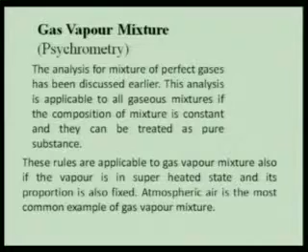Atmospheric air is the most common example of gas vapor mixtures. In this gas vapor mixture, dry air is considered as a pure substance. However, the water vapor is always associated with it in normal practice.

The composition of water vapor with dry air changes with change in atmospheric temperature during the day, and as such this mixture under such conditions cannot be considered as a pure substance, and additional parameters are required for the analysis of such mixture. Psychrometry is the name given to study of air water vapor mixture.

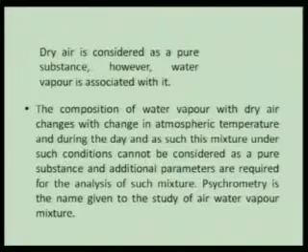I would like to explain it. Air that is associated with water vapor, if its composition does not change, we can treat this air as pure substance, but we are aware that composition of water vapor in the air is changing with time and with the season. In the morning, the moisture contents of air would be more.

As the day progresses, in the afternoon, the humidity contents, the moisture contents of air may decrease. In the evening, again they may increase, and as such during the day, composition of the atmospheric air, as far as it is concerned with dry air and moisture components, is variable.

If this composition is variable, it cannot be considered as a pure substance, and different set of conditions and analysis are required for analyzing the problems in air conditioning, and this science which deals with composition of air and moisture is defined as psychrometry.

In psychrometry, in air conditioning, we are concerned with moist air, and normal atmospheric air is the moist air, and it consists of dry air along with some water vapor associated with it. At normal atmospheric temperature, the water vapor is in superheated state.

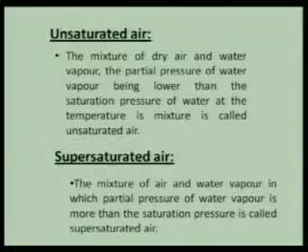Supersaturated air is the mixture of air and water vapor in which partial pressure of water vapor is more than the saturation pressure. When the partial pressure of water vapor is more than saturation pressure, suspended water particles are associated with the water vapor, and the water vapor is wet; this air is defined as supersaturated air.

What we see during the winters, in the morning there is lot of fog.

This fog is a form of supersaturated air, because this air in the morning, when we see that there is fog, that air consists of water particles associated with water vapor, and therefore the visibility becomes poor, and it is supersaturated air. For this moist air, the humid air, we have to define certain additional properties, and these properties of moist air have been defined here.

The first property that we need for moist air is dry bulb temperature. The temperature as measured by a normal thermometer is called dry bulb temperature. Temperature of the air is dry bulb temperature.

The other property of moist air is dew point temperature. The temperature at which water vapor in air would begin to condense if air is cooled, keeping the pressure constant, is called dew point temperature.

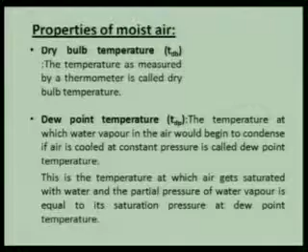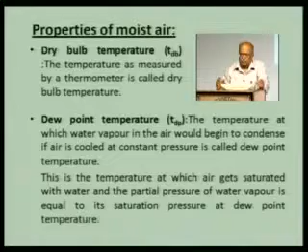We must have seen that if we keep a chilled glass of water on the table, water droplets start condensing on the surface of the glass. That means the moisture in the air starts separating, and the temperature where this condensation starts is defined as the dew point temperature. This is the temperature at which air gets saturated with water, and the partial pressure of water vapor is equal to the saturation pressure at dew point temperature. At any temperature below this, the water would start separating from the air, and separation of moisture takes place.

Then the next property is the wet bulb temperature. The temperature measured by a wet bulb thermometer, a thermometer whose bulb is covered with a wick saturated with water and placed in moist air, is defined as wet bulb temperature.

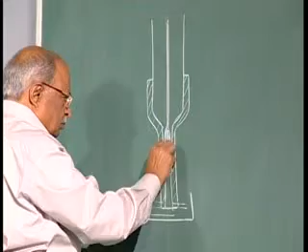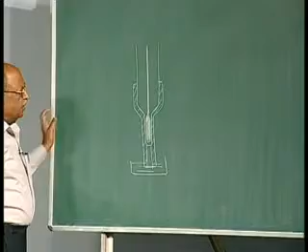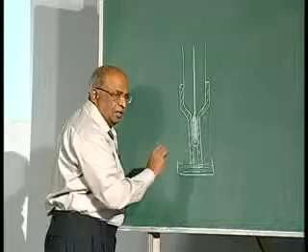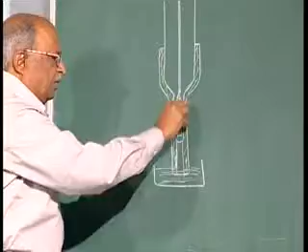This is a wet bulb thermometer. It is a simple glass thermometer whose bulb is covered with a cotton wick, and this cotton wick is kept moist by water always, because of capillary action this water rises up, and this wick is always wetted. When the wick is wetted and air moves across this wick, evaporation of water will take place.

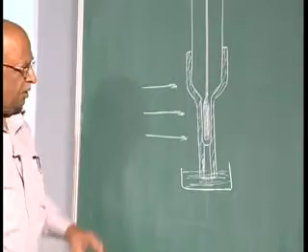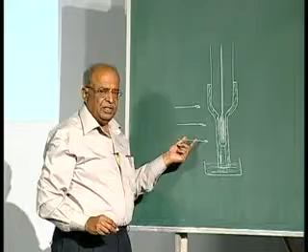Once the evaporation of water takes place, the temperature read by the thermometer would be less than the temperature of the air. Air is at a certain temperature, but when it flows over the wick, the temperature of the wick gets reduced because of evaporation of water. The sensible heat of water is converted into latent heat, the temperature reduces, and the temperature read by this thermometer is defined as the wet bulb temperature.

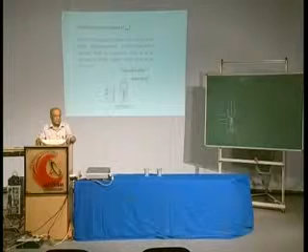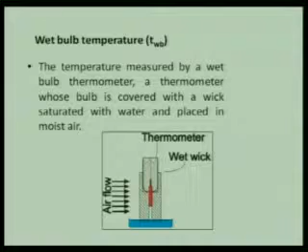The phenomena is same as in earthen pots where the water gets cooled, because of evaporation of water from the surface. The same thing happens here: evaporation takes place from the surface of the thermometer bulb, and because of this the temperature read by this thermometer is lower than the air temperature. This temperature, as read by the wet bulb thermometer, is defined as wet bulb temperature.

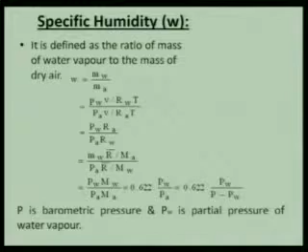Then many more properties that are required to be defined include specific humidity. It is defined as the ratio of the mass of water vapor to the mass of dry air. Moist air consists of a mixture of water vapor and dry air. Suppose m_A is the mass of dry air and m_W is the mass of water vapor associated with dry air, then specific humidity W will be equal to m_W upon m_A, as per the definition.

Now, m_W, the water vapor, if it is in the superheated state, we can apply the gas equation: m_W equals P_W V divided by R_W T. This is the simple gas equation, P V equal to m R T, or m equal to P V upon R T. So for water vapor we write, with subscript W, P_W, the partial pressure of water vapor, multiplied by volume, divided by the gas constant for steam into T.

For m_A we can write P_A V divided by R_A T, where P_A is the partial pressure of dry air. In this equation, V cancels away, T also cancels away, and therefore the equation can be written as P_W into R_A divided by P_A into R_W.

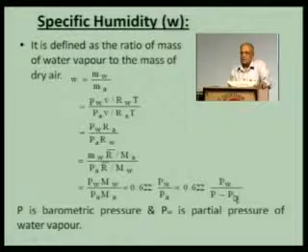That is 0.622 P W upon P minus P W. P A, partial pressure of air, is equal to barometric pressure minus partial pressure of water vapor from Dalton's law of partial pressures, and therefore we can write W is equal to 0.622 P W upon P minus P W. This is how we can calculate the specific humidity.

The next property for air is relative humidity. We represent it by the letter phi, and relative humidity is defined as the ratio of partial pressure of water vapor to the partial pressure of water vapor if the air would have been saturated at the dry bulb temperature of the air. That is, if the actual partial pressure of water vapor is P W, and if this air is saturated at the same dry bulb temperature and the partial pressure becomes P W S, then the ratio of P W upon P W S is equal to phi.

This is unsaturated air. Normally, air exists as unsaturated air, and if a lot of moisture is added to the air, it would become saturated. When we add moisture to the air, its partial pressure would increase, and if the temperature is kept constant while adding the moisture, the saturation pressure of air at the given temperature would be P W S. The ratio of P W upon P W S is relative humidity, phi.

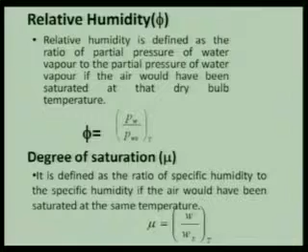The next property is degree of saturation. It is defined as the ratio of specific humidity to the specific humidity if the air would have been saturated at the given temperature. That is, the specific humidity of air at a given condition is W, and if moisture is added and it becomes saturated at the same pressure and temperature, the specific humidity would be W s. Then W upon W s at the given temperature and pressure is defined as degree of saturation.

When the air flows through this chamber, as the air is unsaturated, water vapor will evaporate into the air, and if it is a very long chamber, when the air leaves the chamber it will get saturated. As the air gets saturated by evaporation of water in the chamber, the latent heat of evaporation of water will be extracted from the sensible heat of air. That is, the sensible heat of air will be converted into its latent heat, and as sensible heat is converted into latent heat, the temperature of the air will reduce, and at the outlet the temperature of the air would be less than the temperature of the air at inlet, and it is brought to saturation condition under adiabatic conditions.

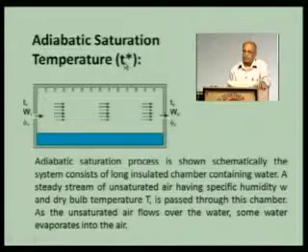This temperature at the outlet of the chamber would be termed as adiabatic saturation temperature. Air has been saturated adiabatically in the chamber, and therefore this temperature T2 is the adiabatic saturation temperature, which we denote as T asterisk. The moisture in the air increases and the temperature decreases, as the latent heat of vaporization of water is drawn from the air.

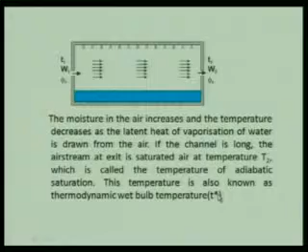If the channel is long, the air stream at exit is saturated air at temperature T2, and this air temperature is called the temperature of adiabatic saturation. This temperature is also known as the thermodynamic wet bulb temperature, T star. These are the properties of air required to be defined for all air conditioning purposes.

Then the properties required for calculation are the enthalpy of the moist air. Enthalpy of moist air is expressed as the sum of the enthalpy of dry air and the enthalpy of associated water. We had earlier discussed the Gibbs-Dalton law, which says that the property of a mixture is the sum of the properties of its constituents. Here, the constituents are considered as dry air and water vapor, so the enthalpy of moist air would be the sum of the enthalpy of dry air plus the enthalpy of water vapor.

H v is the specific enthalpy multiplied by the mass of water vapor associated with dry air. So H a is the enthalpy of 1 kg of dry air, whereas W into H v is the enthalpy of water vapor associated with 1 kg of dry air, and therefore the total enthalpy would be H a plus W H g kilojoules per kilogram of dry air. We measure this per kilogram of dry air and not per kilogram of total air, because the water vapor component is constantly changing with dry air. So we need a datum which is constant, and that constant datum is taken as per kilogram of dry air. Whatever moisture is associated with 1 kilogram of dry air is added to H a.

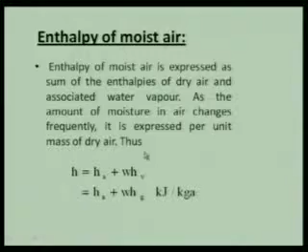All these properties which we have just defined have been tabulated in psychrometric tables, and they are plotted on the psychrometric chart. The tables can be used for very precise calculation, but it is very tedious to use tables for thermodynamic calculations. A more convenient tool for calculation of these properties and various other calculations, the psychrometric chart, is the most preferred tool.

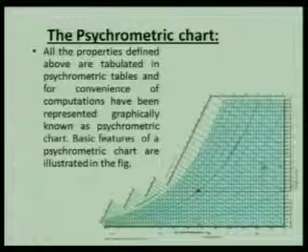All these properties have been represented graphically on this psychrometric chart, and the basic properties are shown here. This figure shows the psychrometric chart. On this chart, the dry bulb temperature is taken on the x axis, plotted in the second quadrant. On the x axis we plot the dry bulb temperature, whereas on the ordinate, that is the y axis, the specific humidity is plotted. This is a plot between dry bulb temperature and specific humidity.

Now, on these coordinates of dry bulb temperature and specific humidity, the saturation curve has been plotted here. This curve shows the properties of saturated air. Relative humidity lines have been plotted as curves shown here—this is one relative humidity line, the other relative humidity line, and so on. So the saturation curve is on the left hand side, and constant relative humidity lines are the curves plotted in the region between the saturation curve and the two axes—this is the saturation curve, the x axis and y axis.

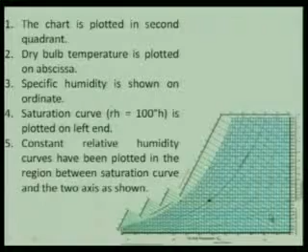There are many curves shown here. These curves show the relative humidity lines, say 10%, 20%, 30%, 40%, and so on. Then the constant wet bulb temperature lines are the green lines shown here—these inclined green lines. This line here shows the wet bulb temperature, and so on. So wet bulb temperature lines are plotted in green color on this particular chart.

The wet bulb temperature that can be read on this chart is at this particular point. Whatever is the dry bulb temperature at this point, you just go vertically down. If you want to know the wet bulb temperature along this line, come to the saturation curve, go vertically down, and whatever the temperature is there is the wet bulb temperature along this line. Okay, I will explain it.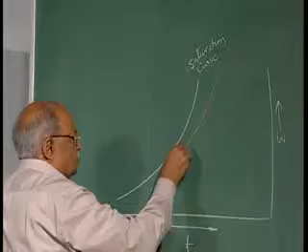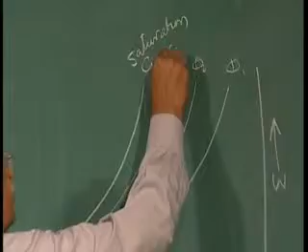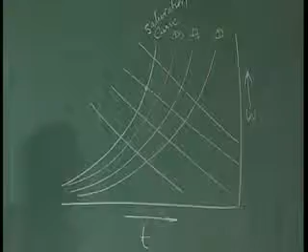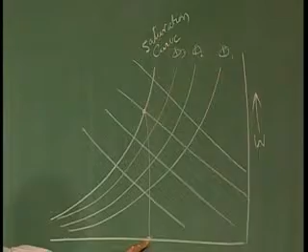These are constant relative humidity lines phi 1, phi 2 and phi 3. The constant wet bulb temperature lines are inclined lines marked here. To know the wet bulb temperature along a line, go to the saturation curve, go vertically down, and whatever temperature is read at that point will be the wet bulb temperature along this line. This line represents this wet bulb temperature, this line represents this wet bulb temperature. So, this is how we can read the wet bulb temperature on the psychrometric chart.

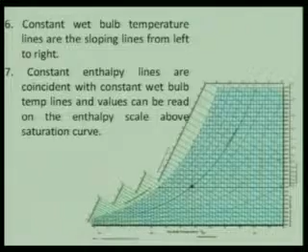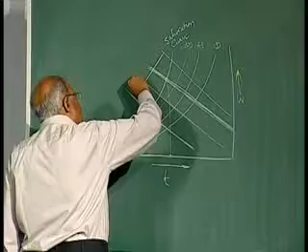The constant enthalpy lines are coincident with the wet bulb temperature lines, but they are read on a different scale. This line also represents constant enthalpy, but the value of enthalpy is given on the scale marked here. So this is the enthalpy scale and this is the wet bulb temperature value. Constant enthalpy lines are coincident with wet bulb temperature lines, and values can be read on the enthalpy scale above the saturation curve.

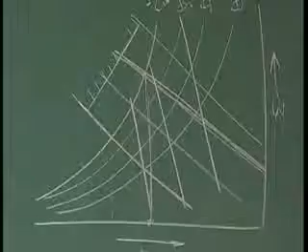Constant specific volume lines are also plotted, and they are steeper in slope. This is the slope of the wet bulb temperature lines, whereas this is the constant volume line marked on the psychrometric chart. It is steeper in slope.

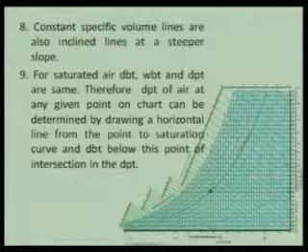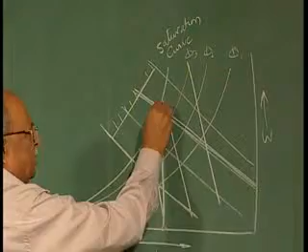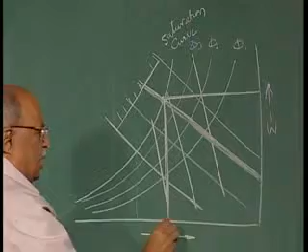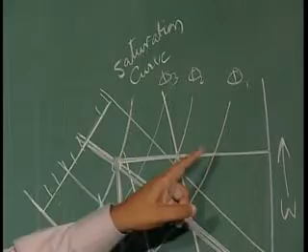For saturated air, dry bulb, wet bulb and dew point temperatures are the same at the saturation curve. At this point, the dew point temperature, wet bulb temperature and dry bulb temperature are the same. When air becomes saturated, the dew point temperature along this line is given by this value, the wet bulb temperature along this line is given by this value, and the dry bulb temperature of air is given here. So at the saturation curve, the temperature represented by this particular point gives us the value of dew point temperature, wet bulb temperature, as well as dry bulb temperature.

How to use this psychrometric chart?

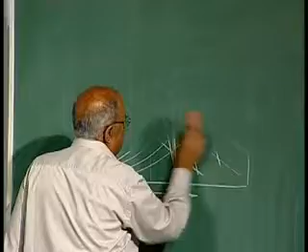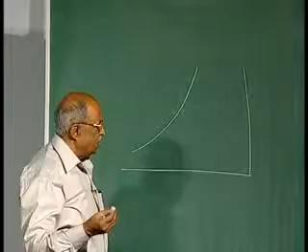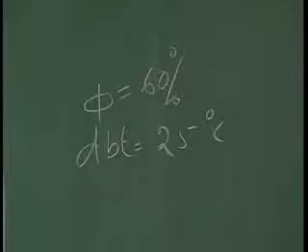This is the psychrometric chart, and we want to find out the properties of air for a given set of properties. A minimum of 2 properties must be known to us to find out all other properties, as was discussed in the initial lectures. Suppose we are given that air exists at a relative humidity of 60% and a dry bulb temperature of 25 degrees centigrade, then find out all other properties. So at the 60% relative humidity line and 25 degrees centigrade,

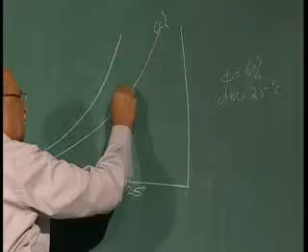mark this particular point. This is the state point of the air at the given condition. All the properties are required to be calculated for this, they are to be read for this particular air. This is the condition point of the air. The specific humidity would be given here. This is W

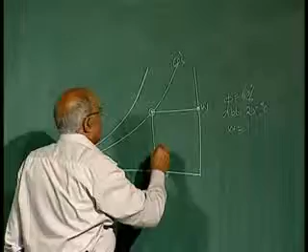on the y axis. The wet bulb temperature would be given by this line. At this point, follow this line up to the saturation curve and at this saturation curve read this temperature. This is the wet bulb temperature.

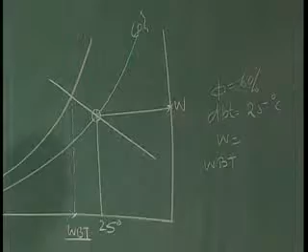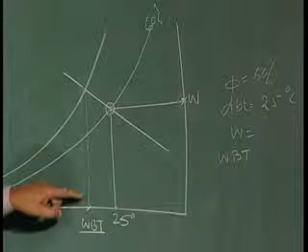How to read wet bulb temperature? Follow the constant wet bulb temperature line passing through this point, and where it intersects the saturation curve, go vertically down up to the dry bulb temperature line, and whatever is the dry bulb temperature at this point, that is the wet bulb temperature of air here.

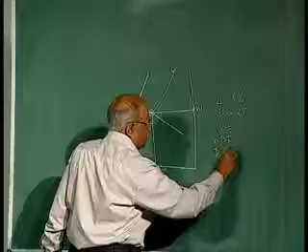The dew point temperature of air at this point: go horizontally to the saturation curve, where this intersects the saturation curve, go vertically down, and at this point read the temperature, and that is the dew point temperature of the air.

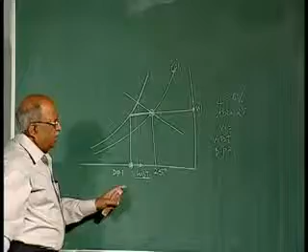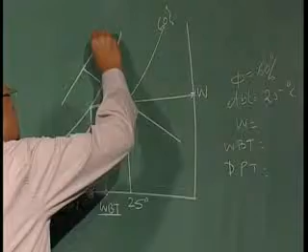So for a given set of conditions of the air, all the properties can be calculated, and the enthalpy of air at this point would be given on the enthalpy scale. Whatever is the enthalpy here, in kilojoules per kg of air, can be read.

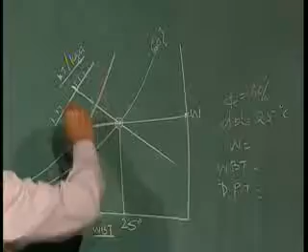So knowing this particular set, with the help of a psychrometric chart, all the properties can be calculated, and once these properties have been calculated, all air conditioning calculations can be made. So this is how we can make use of the properties of air and vapor, and the properties can be evaluated, calculated, and used for computation of air conditioning or any other type of application. Thank you.